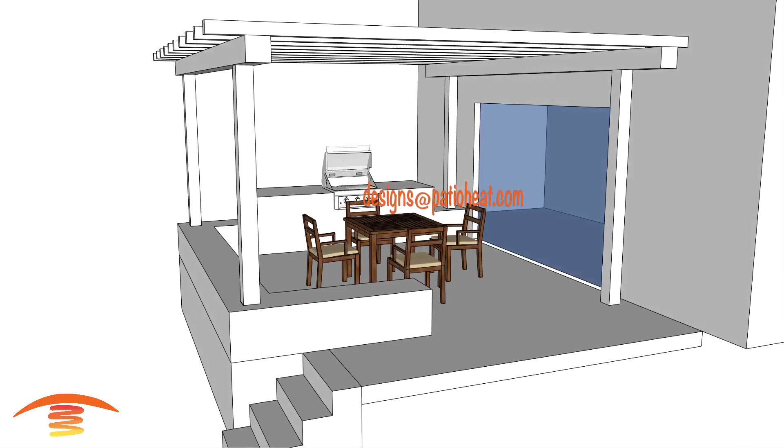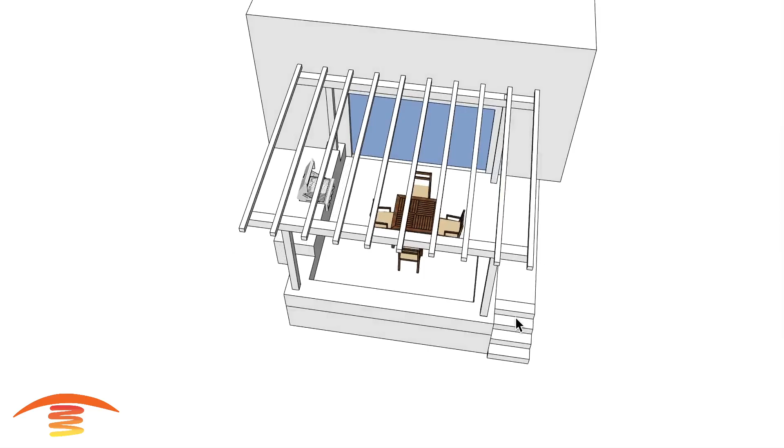Now let's get heating. All right, so here we have this covered patio structure, and let's go right into the overall dimensions. I have 13 feet from inside post to inside post, and 13 feet inside post here to here. You can see also we have a height, and I have these at 4x4 lattice pieces at 9 feet off the finished floor.

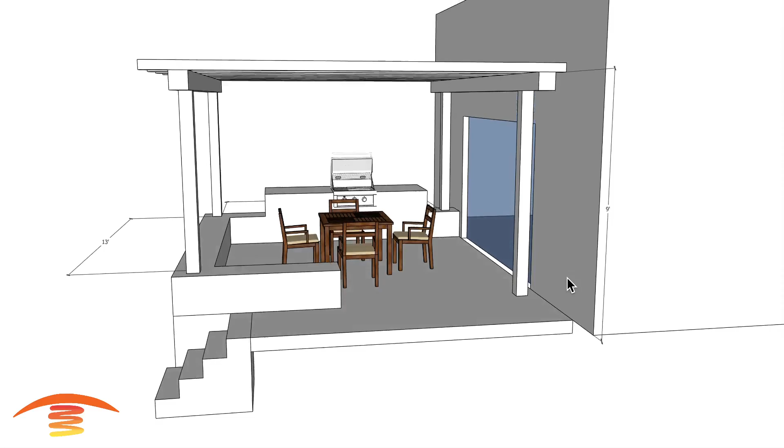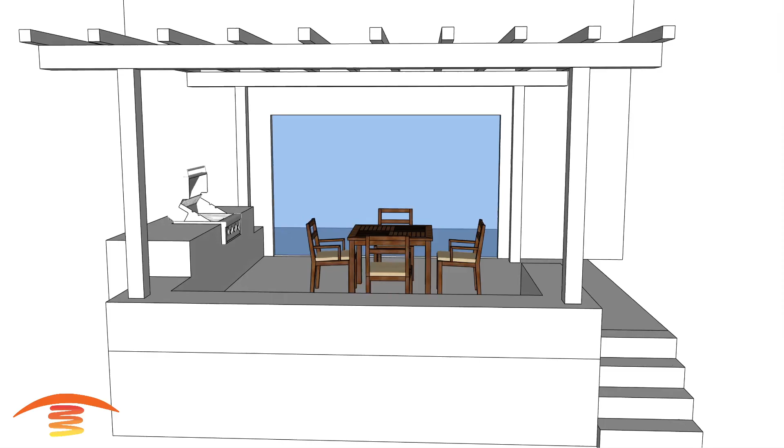All right, let's go ahead and see what kind of options we could do. So basically, the customer had asked about either a SlimLine or a CD series, CD series with the 6,000 watt unit, and if the 6,000 watt unit would work well with the duplex switch as opposed to just the 4,000 watt units.

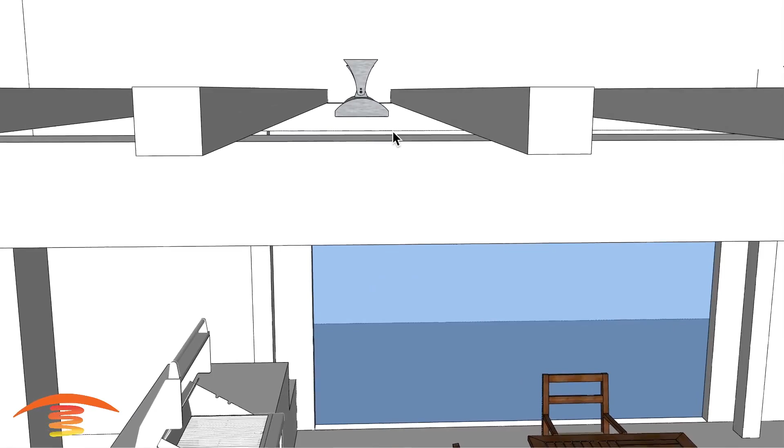So I'm going to install some CD6024s, 6,000 watt 240 volts. Now I have them at the same elevation as the bottom of the heater to the bottom of these 4x4 lattice pieces, and you'll have to come up with your own bracket. Here I'm going to show the bracket in just a minute, but in any case, the main thing you want to be sure of is that you have adequate enough space.

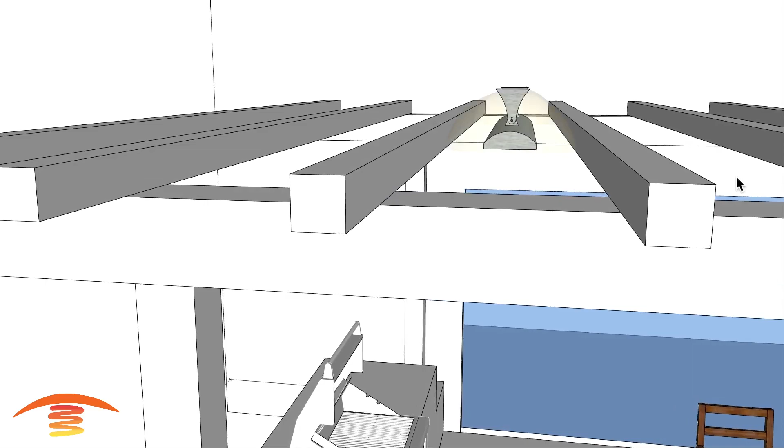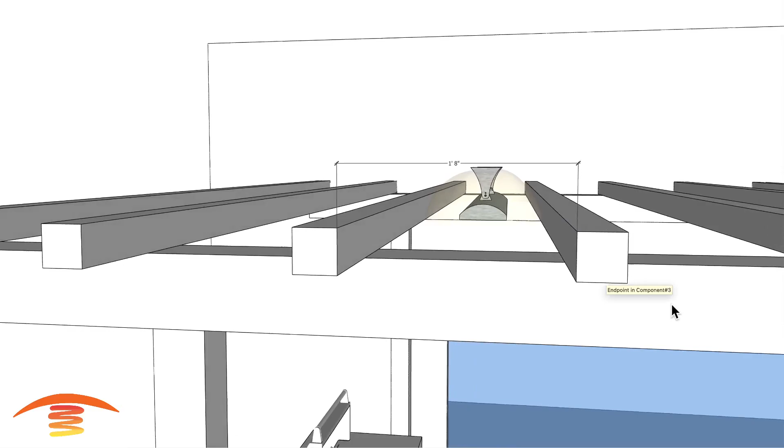So basically what you're looking for on top of the heater is 6 inches on the left, 6 inches on the right, 6 inches all the way around the top, and the heater itself is 8 inches, so that's 20 inches in total. Let's just verify that's what I have here. So from inside to inside, that's 20 inches, and that will meet the clearances above the unit and to the higher side of the unit itself.

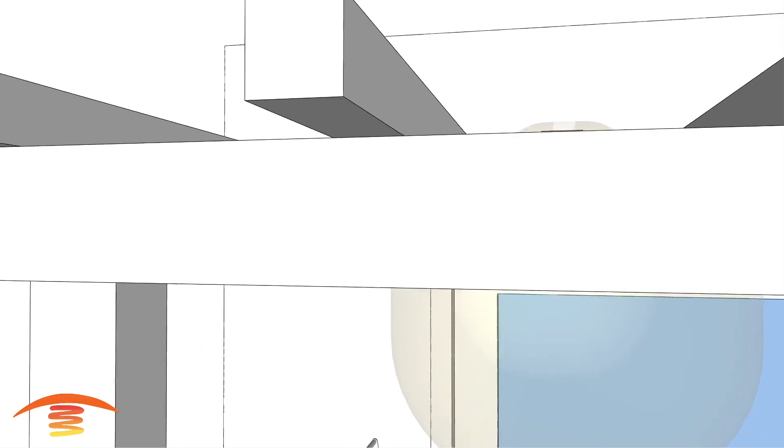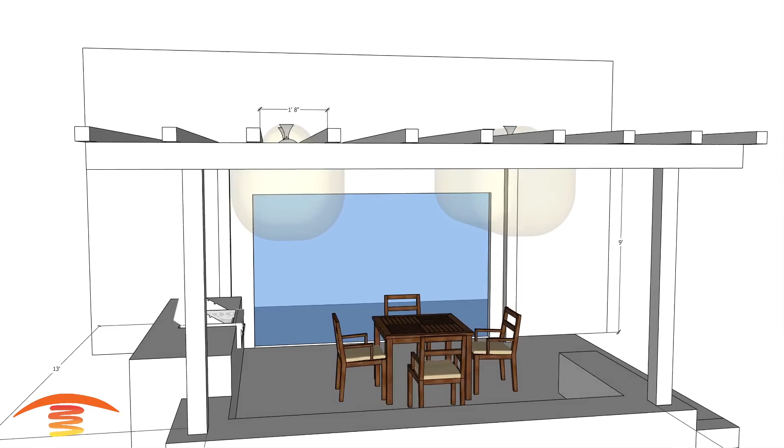Now below the unit, you need to have a minimum of 18 inches on the right, left, front and back. And because we have the same elevation, those dimensions of clearances are met below the heater. All right, let's go ahead and turn that off. Hold on one second, and we'll turn the dimension off there.

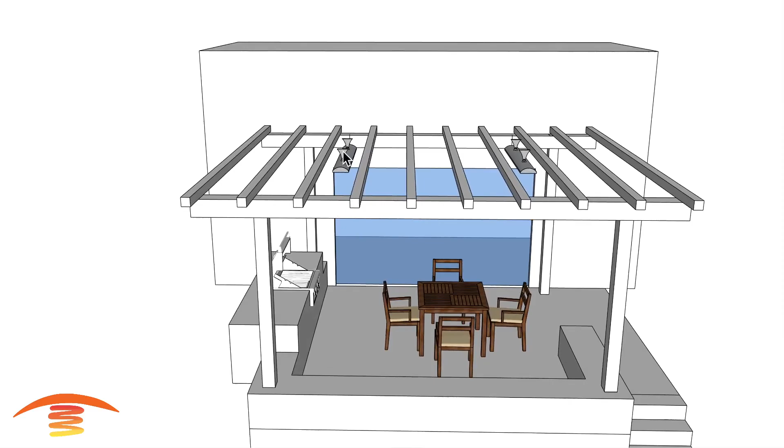And then of course, you can see where I have these located now. It appeared as if the 4x4 posts, there were 10 going all the way across at the total length. Now I don't have the exact distances between these 4x4s, but I placed them in the third opening sections on each left and right side.

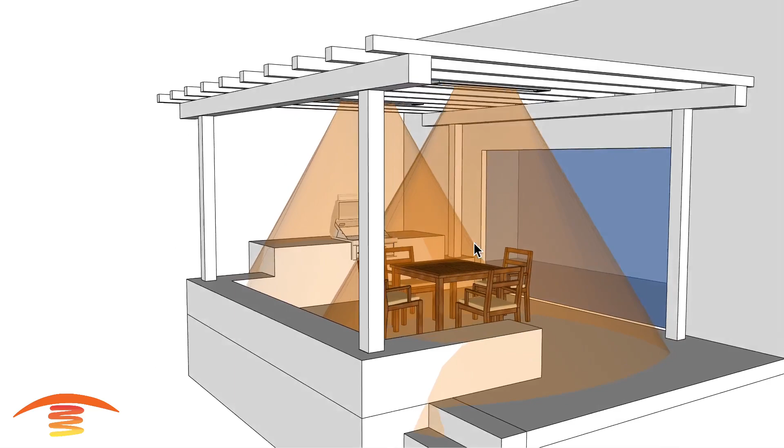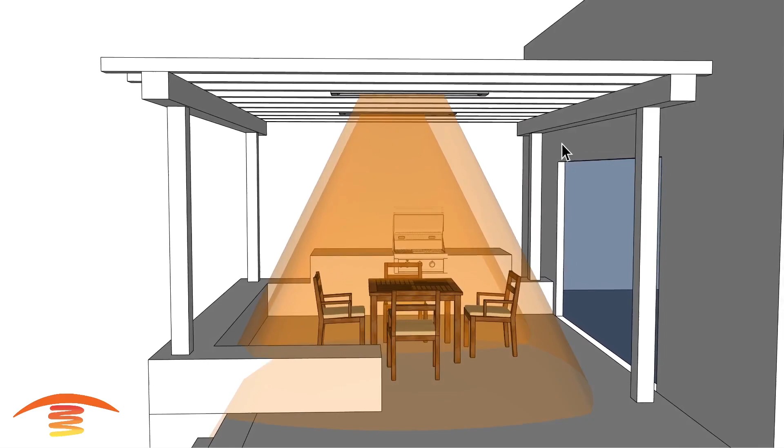Let's go ahead and look at the footprint of heat. So footprint of heat, you can see, is pretty intense with the 6,000 watt units at this elevation. They're really designed for a 10-foot elevation. And just to also note here that I have them physically centered within the patio opening here from here to here.

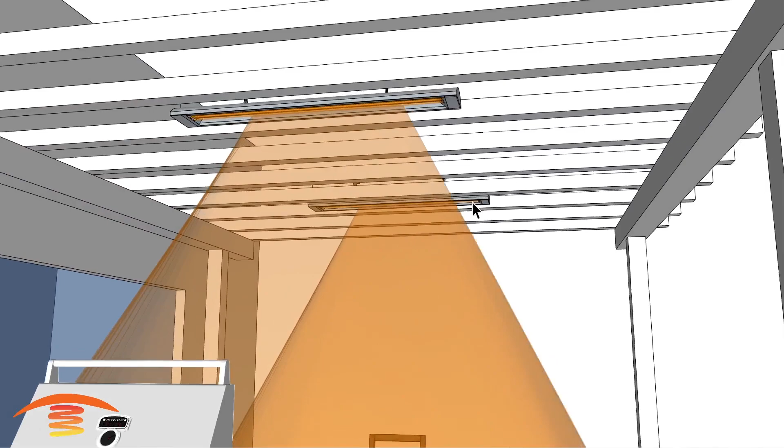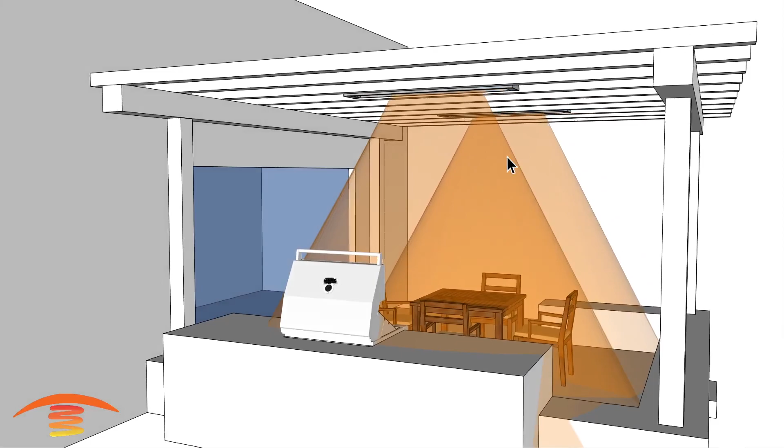Yeah, so again, the CD is designed for a 10-foot elevation installation, and you can see the intensity is pretty hot. And they asked about a duplex switch, how well would that work? The duplex switch would turn one element on, one element off, or both elements on. And I would say that a 3,000 watt heater at this elevation would, for the most part, not be sufficient. And then a 6,000 watt would be too intense. So this would not be my preferred application.

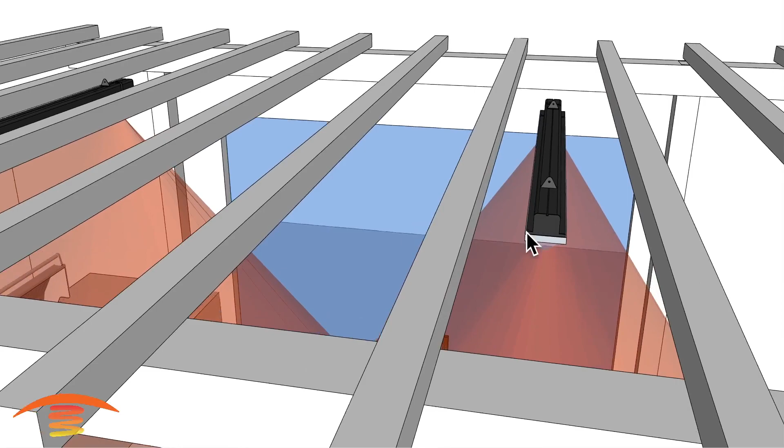So let's go ahead and turn that off and look at the other option that might work. And that is going to be the SlimLine units. And now I've placed the SlimLine units. You can see that they're a little bit shorter. These are 5 inches. The CD is 8 inches. So we're 3 inches shorter.

And the clearances here, below again and above, you can see the above clearance is 6 inches all the way around on all 4 sides, and below 18 inches again.

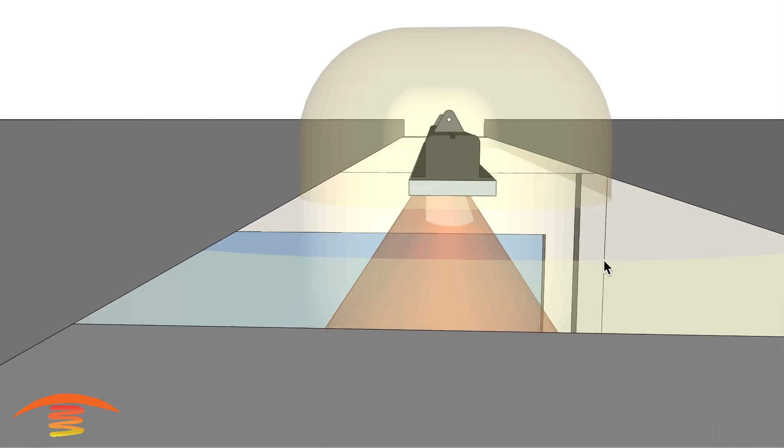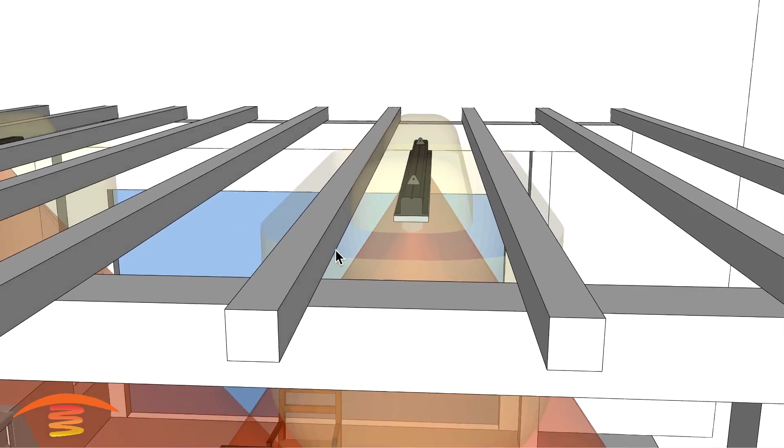But you can see that with the shorter distance on the SlimLine, you could have a little bit shorter distance here. So that would be a total of 17 inches of space that you need between the two beams, just bear that in mind. Now you can also see that I don't have brackets here.

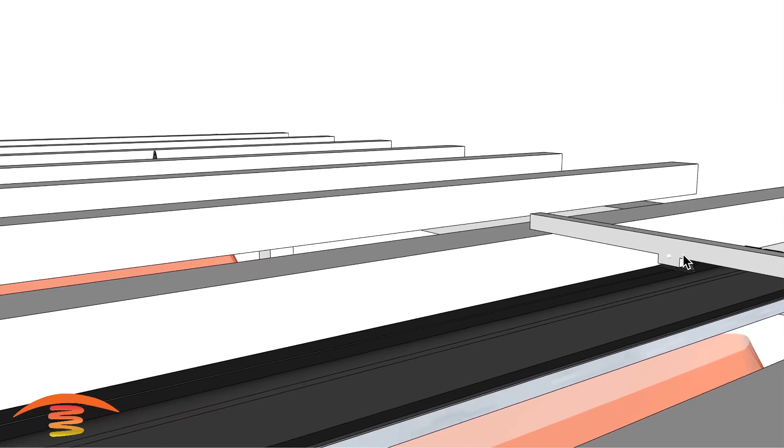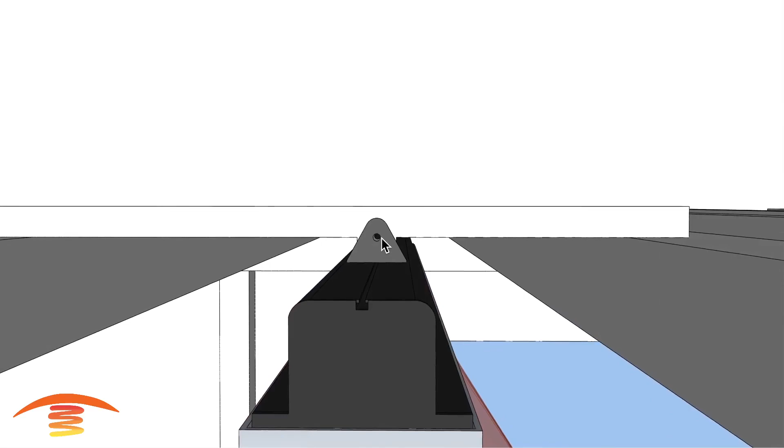I wanted to show a way to possibly make your own bracket. You could take some tubular steel, weld a little piece on the bottom edge, punch a hole right into the center position of the bracket for the heater, and then put a bolt through there. That could be your way of mounting the unit, something of that nature. Just bear that in mind.

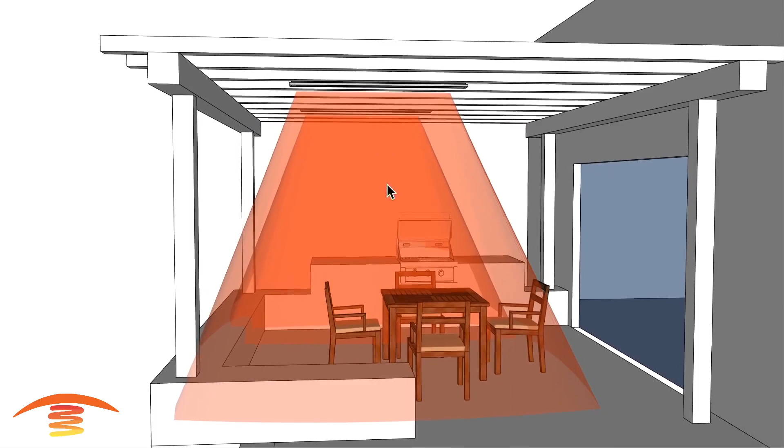Also notice that at the elevation of 9 feet, this is pretty much ideal for the application. Also notice that I've pushed this heater, or both of the heaters, to the outer edge about 18 inches from center, and that way I get a little bit better coverage for the seating position out here.

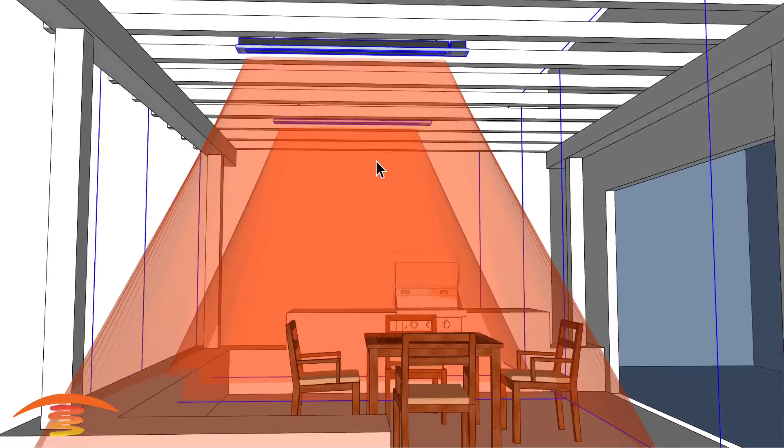If this wall here is not really a seating position, then placing the units in the center of the patio structure itself would be the better option, because you're getting better coverage on the inner edge over here while sitting down. Now 4,000 watts for this elevation is pretty much preferred.

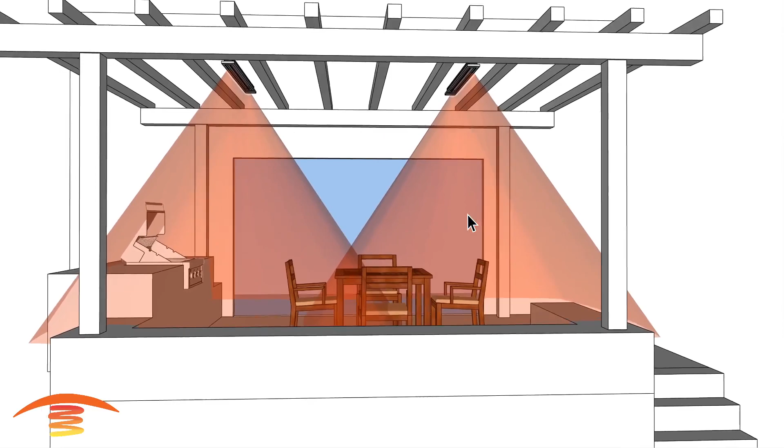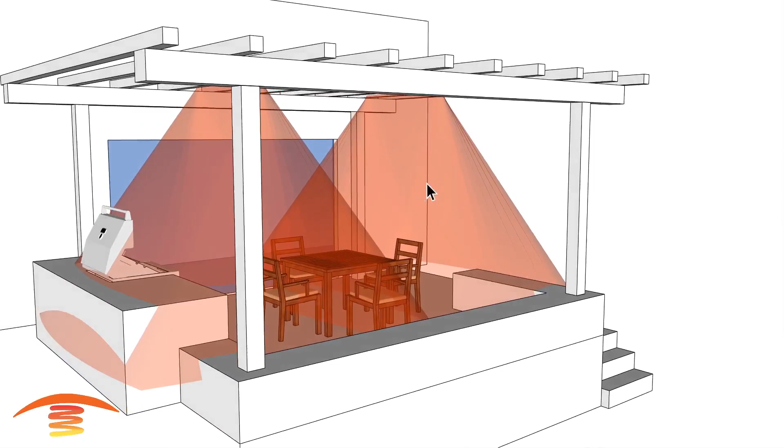There will be days that it might be a little bit too hot, so you turn one on and one off, and then maybe sit in the middle, something of that nature, if this is the only way you want to regulate the amount of heat. I would probably still recommend a control if that's really what you're looking for. However, that's up to the end user.

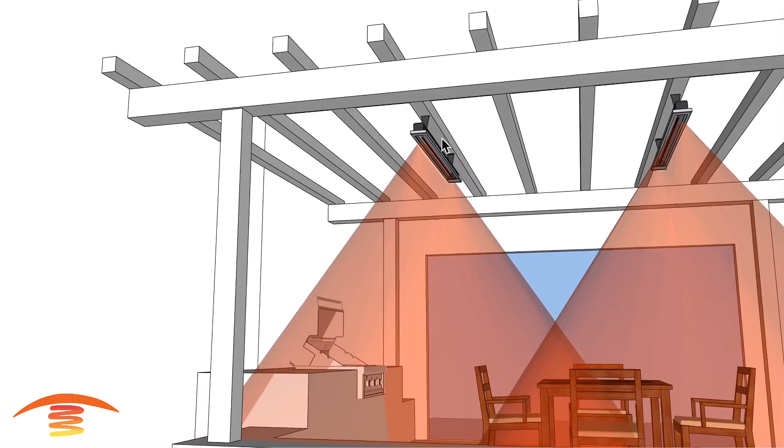So let's go ahead and look at one final option, which would be hanging them from below the beam itself. I'm going to turn off these others. You can see here now I've placed them on the fourth beam on the inside on both sides, and you've got a lot of crossover rays over here, and you're meeting all the clearances using the OEM brackets.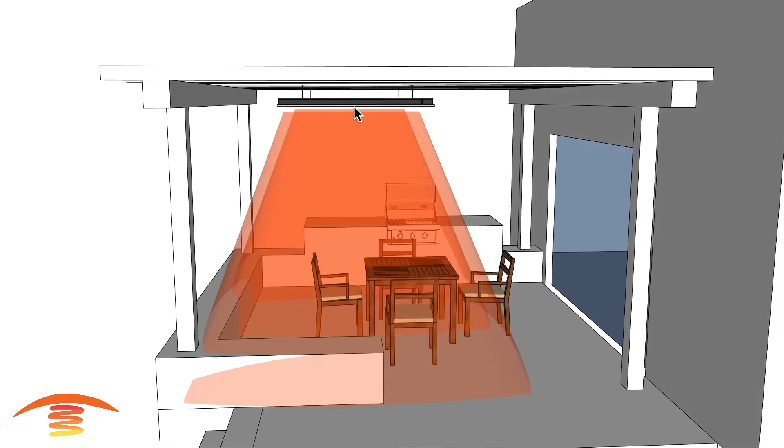You do need to make sure you have that 18 inches of clearance over here. I have this set at 18 inches off center, so the center of the heater is 18 inches to the left of the center of the beams, and that way we're getting a little bit of coverage on this wall over here. But you can easily, like I said before, move them so that they are centered in the patio.

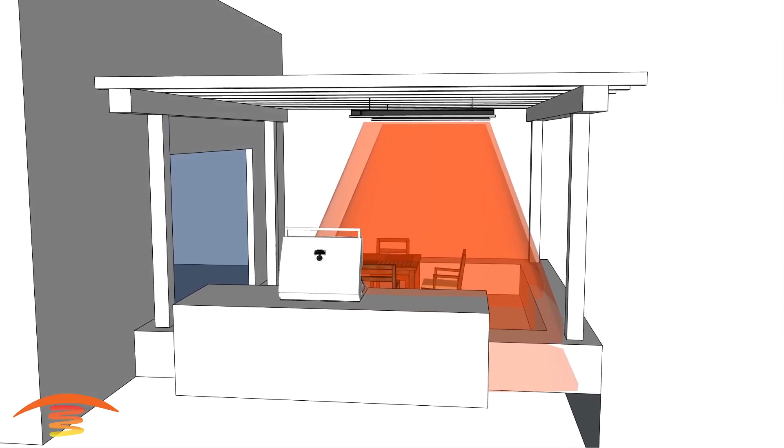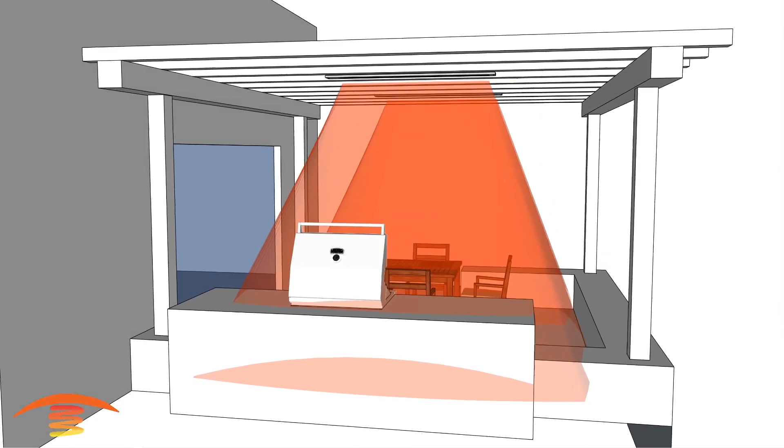My preferred application would be the SLs, the 4,000 watts that I showed here in the center. That would be the ideal looking application. And then if that's not the case, I would go with the 4,000 watt with the OEM bracket, utilizing the OEM bracket.